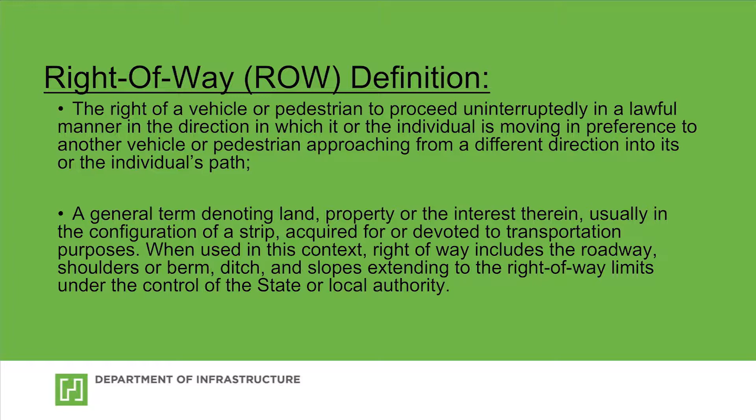Right-of-way definition: the right of a vehicle or pedestrian to proceed uninterruptedly in a lawful manner in the direction in which it or the individual is moving, in preference to another vehicle or pedestrian approaching from a different direction into its or the individual's path. It's also used as a general term denoting land, property, or the interest therein, usually in the configuration of a strip acquired for or devoted to transportation purposes. In this context, right-of-way includes the roadway, the shoulders or berm, the ditch, and slopes extending to the right-of-way limits under the control of the state or local authority - in this case, the City of Hamilton.

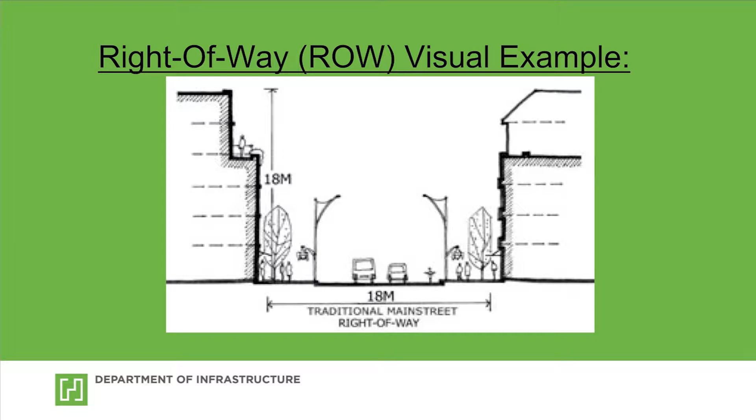This picture gives you a good illustration of the right-of-way. As you can see, the main portion of the street where the vehicles are going down, the curb and the sidewalk are all inclusive of the right-of-way.

Now, we get a lot of questions here at City Hall about vegetation maintenance in the right-of-way. We have a codified ordinance, I believe passed in the 1980s, ordinance 915.02 q and 915.05.b, which explains the responsibility of maintenance of plantings in or overhanging the public way. The public way means any public street, highway, public easement, sidewalk, alley, curb lawn, or public waterway, and includes the entire width of any right-of-way when any part thereof is open to use of the public as a matter of right for purposes of vehicular or pedestrian traffic.

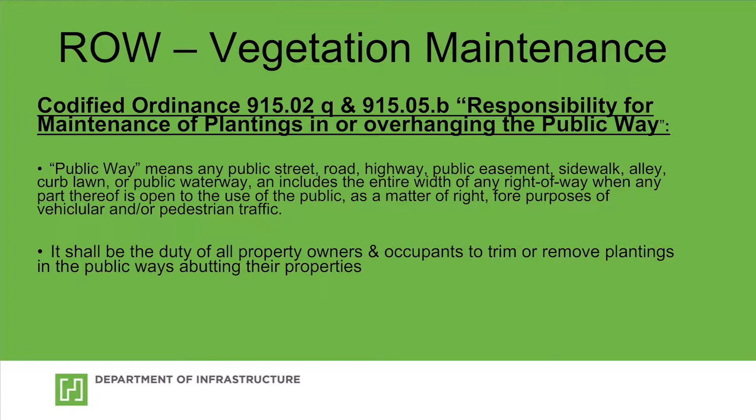Now, what this means, based off the codified ordinance, is that the owners of the property must maintain any of that vegetation in the right-of-way. That's the way it's set today. It shall be the duty of all property owners and occupants to trim and remove plantings in the public ways abutting their properties. This applies along all city streets as well as along all alleyways throughout Hamilton.

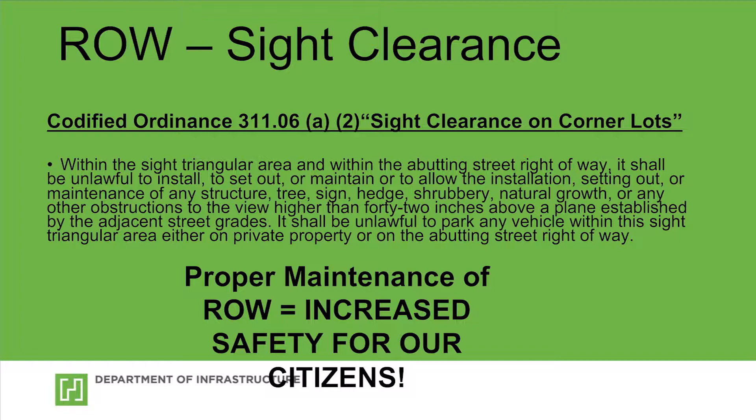Right-of-way sight clearance - this is a common problem, especially within South Erie Boulevard, which is Route 4, where we have a lot of our car sales businesses. Essentially, sometimes they park too close to the sidewalk and interfere with the right-of-way. We must maintain proper sight distance, and if we don't, it creates a safety problem. Proper maintenance of the right-of-way equals increased safety for our citizens - this is a very important point. If we don't maintain, cut vegetation blocking signs and visibility, then we can create a very unsafe environment for our citizens.

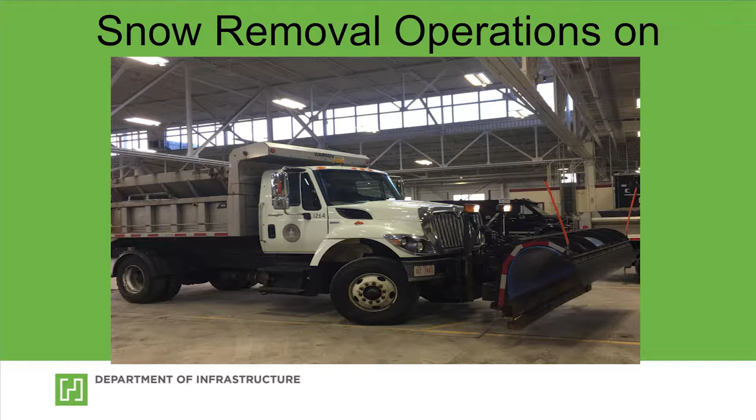Now, with this, I'd like to move and transition to another portion of the right-of-way which impacts our snow removal operations here in the city.

So to do that, I want to explain a little bit about what we do when we do snow operations. This is a big deal because we're coming through the winter of 2018, and hopefully we're through it. But if not, this gives you an idea of some of the things we have to take into consideration when we do snow removal operations in the right-of-way.

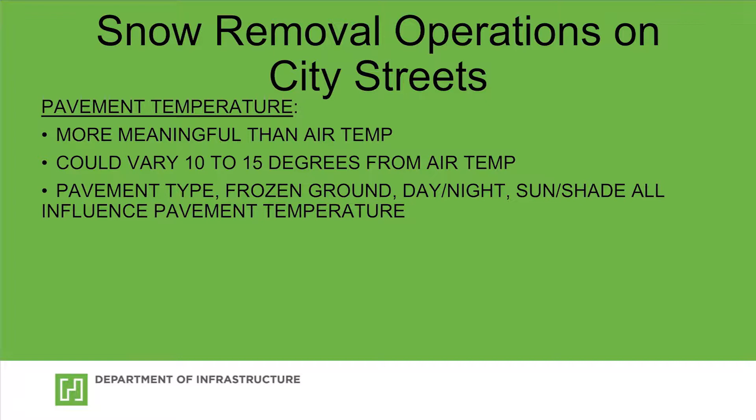Pavement temperature is more meaningful than air temperature. It could vary 10 to 15 degrees from air temperature. Pavement type is important as well, and all those factors are considered in the way we remove snow within our city.

As far as the melting time of salt, we use primarily salt within our removal - you see it in our salt trucks - but we also use calcium chloride, especially when temperatures dictate that. At 0 degrees, it takes salt mixed with calcium chloride about 30 minutes to melt snow.

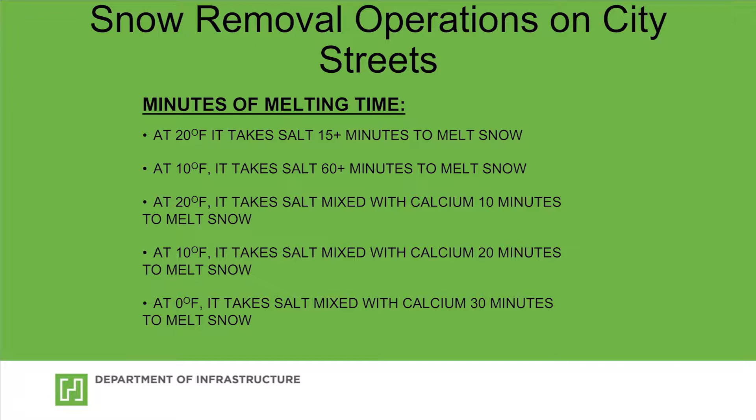Now in the right-of-ways, we do have a strategy associated with removal of snow. Our strategy is primaries first, secondaries next, parking lots city-owned follow that, and then sidewalks city-owned follow that.

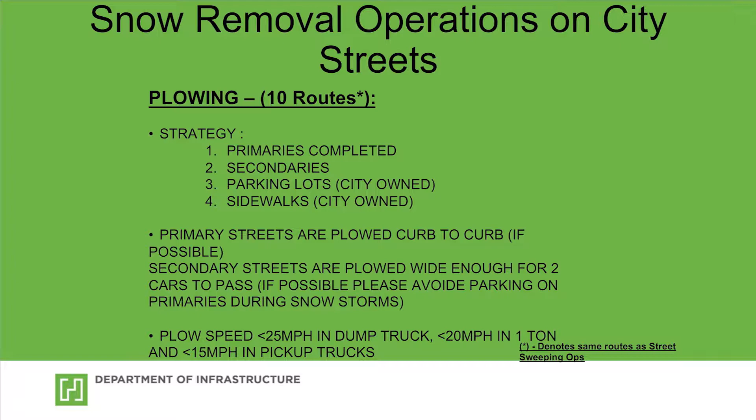The primary streets are plowed curb to curb, and the plow speed typically is about 25 miles per hour per truck. As we move through the winter conditions, we move straight into what we consider our street cleaning season, and that usually lasts from March through about the middle of November.

That's something I really wanted you to pay attention to, because if we didn't clean the streets, then essentially a lot of the debris that accumulates from trash and other means would end up in our waterways. So street sweeping is actually collected and then we haul it to our lift station, our transfer station, which is then hauled to the dump.

So we currently have 4 street sweepers in operation. Three sweepers operate every day, Monday through Friday during season, and we basically have 1 in redundancy.

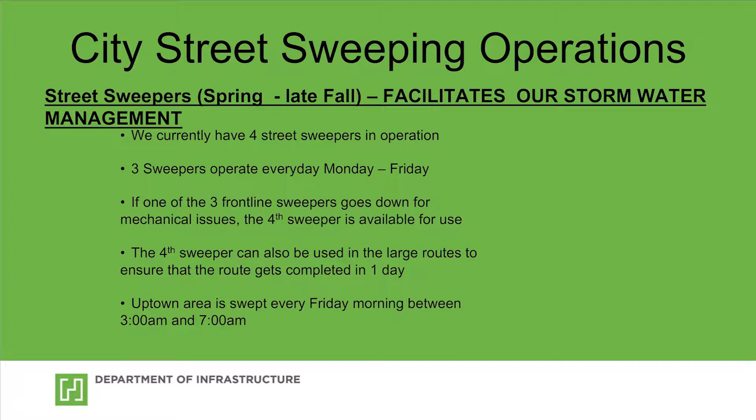The 4th sweeper can be used to facilitate any issues that we may have associated with one of our events, like some of the music events that we have along the river, or some of our events like Operation Pumpkin.

This gives you an example of the routes that those sweepers cover over a 2-week period. We have 10 routes, and these are the same routes that apply to our snow removal operation, so the same coverage based off the same routes. What you see here is the street sweeping routes by day for week 1 and week 2.

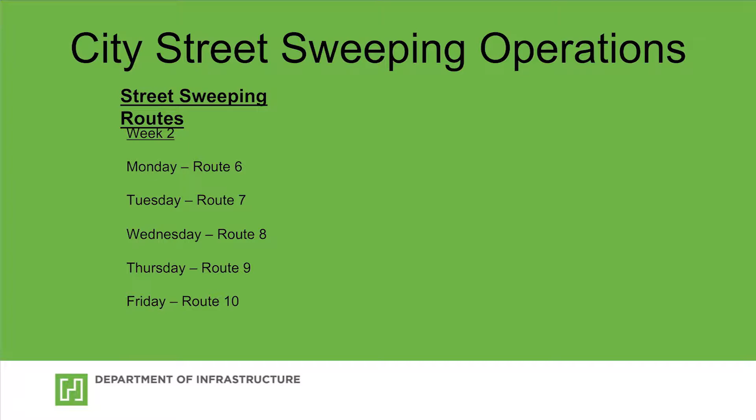So now we've moved into the fall, and we have leaf pickup and removal operations that happen again in the right-of-way. With this, you can see we have 2 different types. One is a manual type, where we have 2 men basically working the vacuum unit that trails behind the truck.

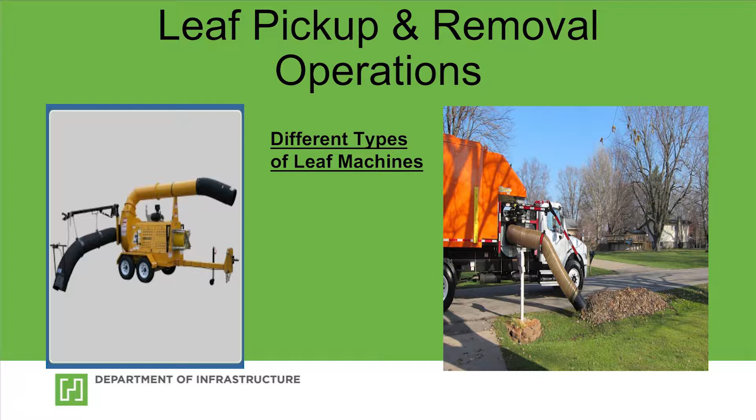And then we have the newer unit, where basically the laborer never has to leave the cab of the truck. Everything is handled through mechanical operation of the vacuum.

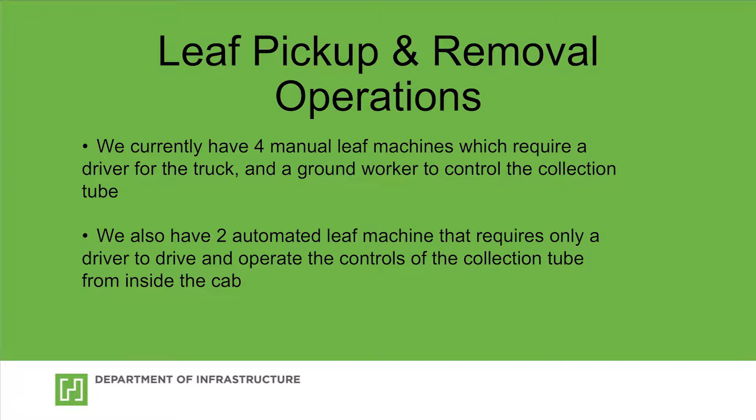Historically this starts the last week of October, and we run about 2 to 3 routes scheduled per week. But through our 311 system, we're actually still collecting leaves right now as we speak. Our 311 system is very comprehensive, and it lets us know what tasks we need to complete, so please continue to use that - it helps us evaluate our own performance.

Our goal for leaf removal is to be done by Christmas, but as you know, we got snow right around that time frame, and we've had pretty much snow up until last week. So we'll also be collecting leaves and street sweeping beginning here shortly, as long as weather permits.

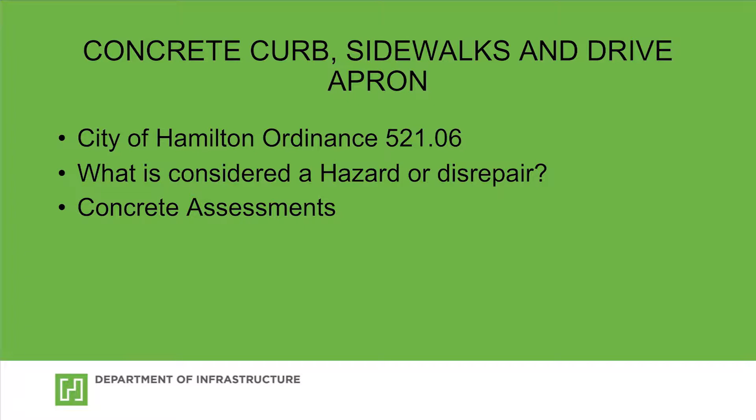We'll be discussing City of Hamilton Ordinance 521.06, what is considered a hazard or disrepair, and how a concrete assessment program works. City of Hamilton Ordinance 521.06 puts the responsibility for maintaining the concrete curbs and sidewalks onto the abutting property owner.

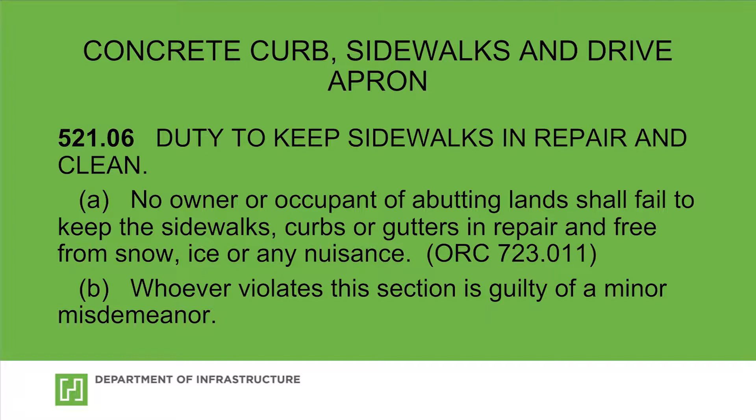Common hazards for sidewalks and driveways consist of sunken areas that trap water. This can cause ice in the wintertime and algae on the sidewalks in the summertime if it stays constantly wet. We're also looking for whether the concrete is raised a half inch or more, which could cause someone to trip. This is a guideline handed down to us from the Department of Justice through the Americans with Disabilities Act.

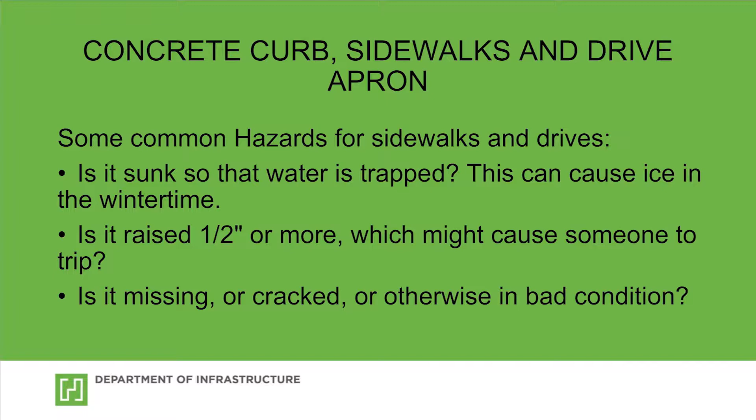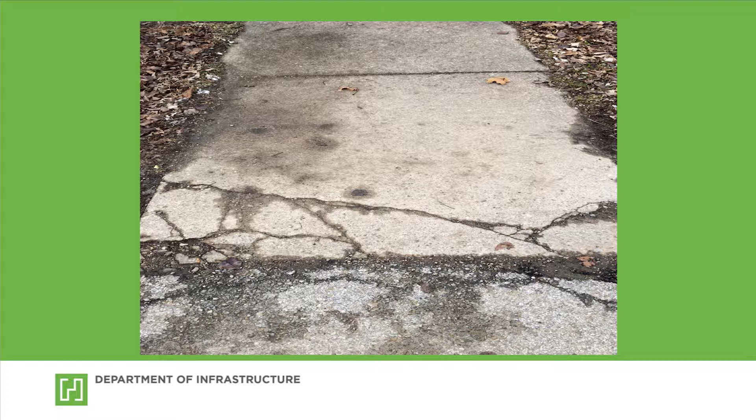We also look for missing pieces, cracks, or otherwise bad condition. Here's an example of a sidewalk block that has multiple cracks. You can see sections of the concrete just popping out. This would be considered a hazard. Here's a common hazard throughout the city in our older neighborhoods where we have a lot of trees that heave the sidewalk, causing tripping hazards.

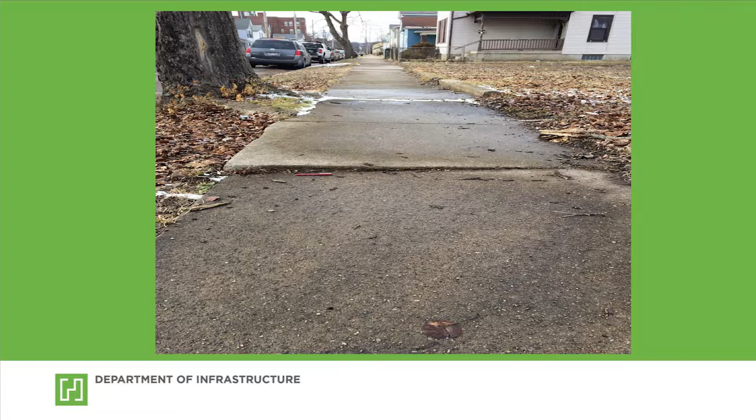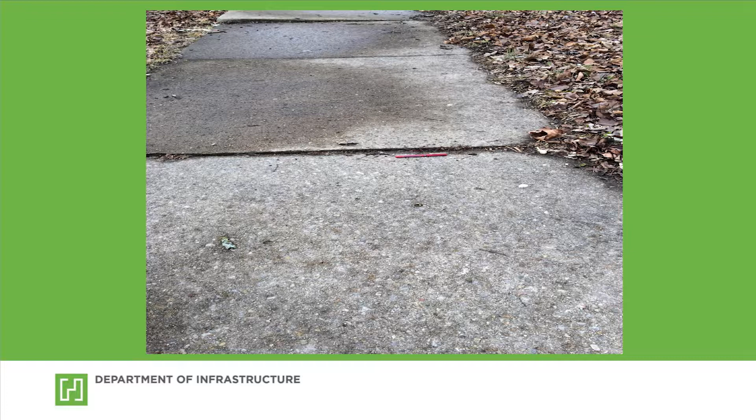Here's a smaller hazard, but it still meets that half inch tripping hazard requirement. Half an inch is a pretty small amount in reality, about the thickness of a pen.

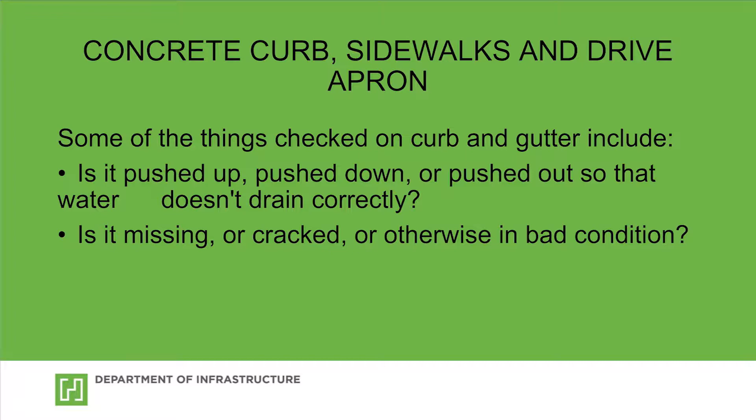Some things that we check for when it comes to curb and gutter include whether it's pushed up or down, or pushed out so that the water does not drain correctly down the roadway, causing water issues, and whether it's missing or cracked or otherwise in bad condition. Here's an example of a piece of curb where it's got multiple cracks in it, chipped out, just in bad condition.

Part of the concrete assessment program, every year the City of Hamilton has a resurfacing project that includes concrete assessment. We send out property owner notification letters that state you have so many sidewalk blocks and so many lineal feet of curb that are considered in disrepair.

Once a property owner receives a letter, they have the option of doing the work privately or having the City of Hamilton perform the work, and then it will be assessed to the property. When we say assessed to the property, that means the City of Hamilton will send them a bill and they have the option of putting it on their property taxes or paying it outright at that time. If it's rolled onto the property taxes, you have 5 years to make the payments.

Can a property owner request to have their concrete assessed? As it sits right now, a property owner can only have the concrete assessed if it's part of our resurfacing program. So if you're on one of the streets that we're doing for that year, then you can have more concrete assessed, or we will notify you of what's just needed. But we don't allow a property owner to just contact us and say, I would like to have it fixed by the city and have it assessed.

I'll now be turning it over to the Transportation and Traffic Division, Scott Hoover.

Hello, my name is Scott Hoover. I'm the Traffic Operations Manager for the City of Hamilton. My responsibilities include conducting various traffic safety studies, traffic signal timings, sight distance complaints at intersections, parking studies, parking lot rental and leasing, handicap parking on city streets, and construction and festival road closure plan and design. I'm also responsible for the traffic sign shop, traffic signal shop, parking meter operations, and parking garage operations.

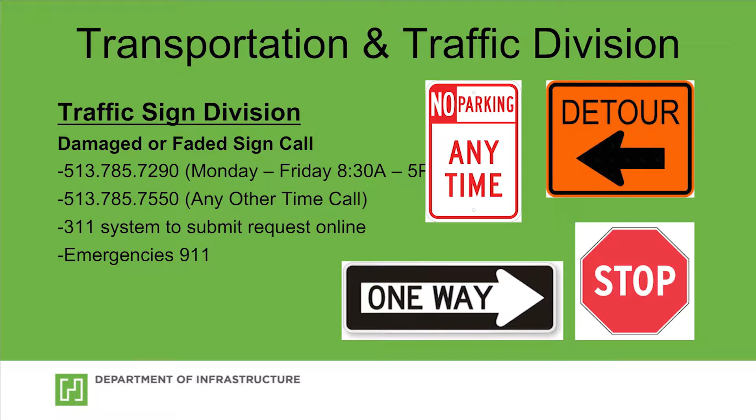The two numbers listed are not emergency numbers. One is for normal business hours and one is for after hours. Of course, the 311 system would still apply to this division. For emergencies, always call 911. Examples of an emergency for the sign division would be a sign that was hit and is sticking into the roadway or onto the sidewalk, which would cause a hazard.

The traffic signal division consists of 2 employees as well. They're responsible for inputting traffic signal timings and the maintenance of approximately 100 of the city's traffic signals. They're also responsible for the installation of all new traffic signals, as well as airport beacons.

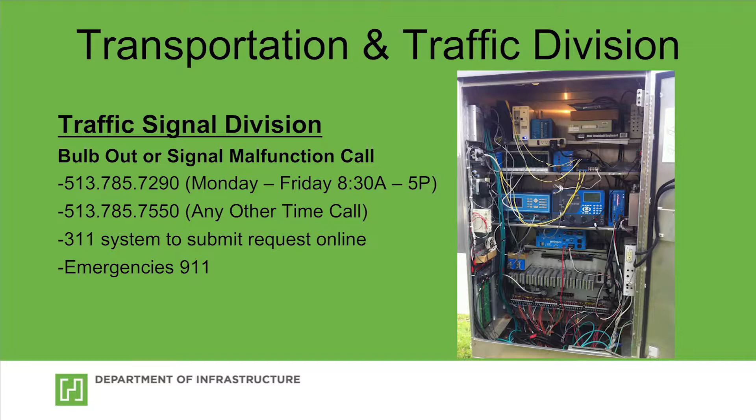Examples of malfunctions for the traffic signal division would be the signal timing not being what you're used to on your daily commute. If you encounter something like this or a bulb out, you're encouraged to call the 2 numbers listed, and again, the 311 system, as well as emergency, you would want to call 911. Examples of an emergency would be the signal being on flash or the signal being completely out. Those are the examples of a 911 call.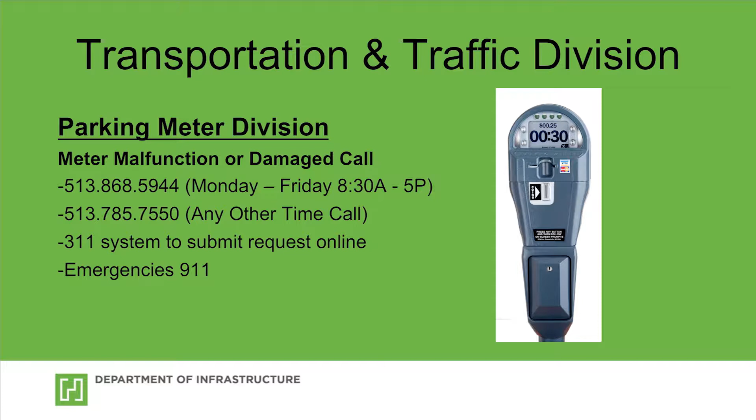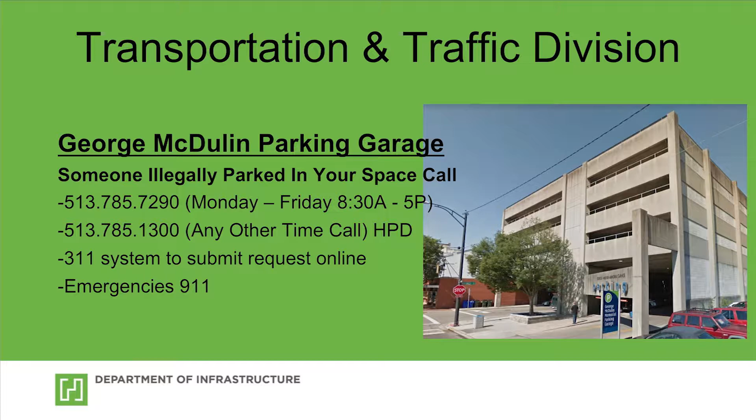For the parking garage, if someone's parked illegally in your space, you're encouraged to call the numbers listed as well. For emergencies, if you encounter any type of emergency, such as being stuck in the garage, 911 would be the call for that as well.

Next up is Alan Messer to talk about stormwater. My name is Alan Messer. I'm an engineer on staff here at the city. I'm going to talk about stormwater, specifically stormwater within the right-of-way.

Starting out, what is stormwater? When we refer to stormwater, we're typically referring to stormwater runoff, and that is essentially any precipitation that falls on the ground and doesn't soak in, but flows across the ground.

Hamilton is a very old city. In the early 1800s, when Hamilton and, at that time, Rossville were founded, most of the stormwater was conveyed by open channels, open ditches, that flowed through the roadways. As development progressed, they enclosed those ditches. In the mid-1800s, the image on the left is an old stone sewer that we believe was constructed probably mid-1800s, pre-Civil War. Some of those are still in operation today. It's amazing the craftsmanship that went into those.

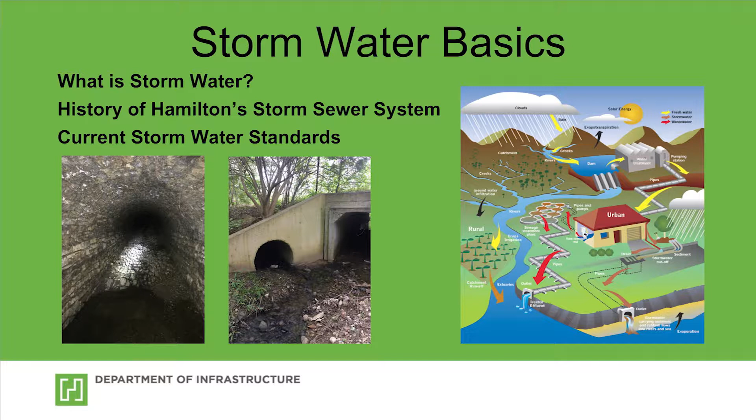Today's stormwater standards typically involve concrete or plastic pipe installation. There are certain industry standards that we design to today, as far as sizing. Also today there's what's called stormwater quality requirements, a federal regulation that says you're to slow down the water so that pollutants and sediments settle out before it reaches a natural water course.

Here in Hamilton, most of our stormwater eventually ends up in the Great Miami River, and all of us are responsible to keep trash and debris out of that water. The image on the right of the slide shows another typical section, similar to what Jim showed earlier, showing some of the stormwater facilities within the right-of-way.

One facility people often don't think of is the ditch. The roadside ditches are maintained by city crews. Now, ditches on private property are another matter, but some roads here within the city are served solely by ditches or by a combination of curb and ditches. So the curb also is a stormwater facility.

Now, the curb, as Pat mentioned earlier, is the property owner's responsibility to maintain. The city does do street sweeping and other activities to keep it clean, but the ongoing maintenance of that belongs to the property owner.

The curb inlets, or catch basins as people call them, are city maintained if they're within the right-of-way. Those that fall on private property, like parking lots, are typically privately maintained and the property owner's responsibility. A newer feature we have, started in the late 2000s, is installing sump lines, and those sump line collectors are essentially there to collect people's discharge from their basement sump pumps.

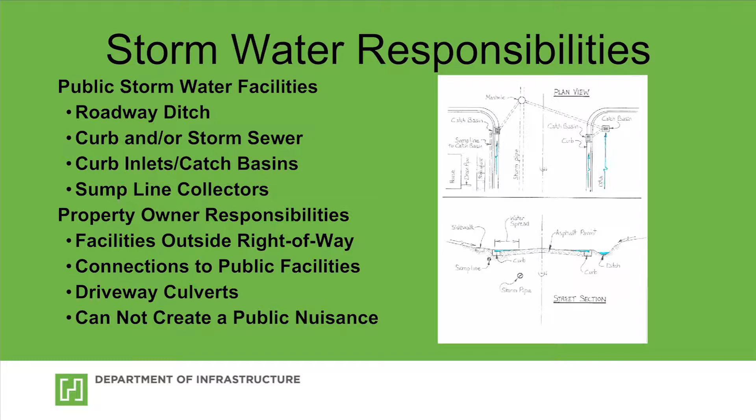Where we typically see that situation is a sump pump that discharges near the right-of-way or into the right-of-way, crosses a sidewalk, or dumps onto the curb and creates an icing situation, or algae in the summertime. It's the property owner's responsibility to properly dispose of that water, which may mean running it down the street to the nearest catch basin or taking it to a ditch or somewhere that it's otherwise properly disposed of.

Some common indicators of a problem within the stormwater system: the upper left picture is an example of flooding within the street. Some water standing on the sides of the road would be expected, maybe 6 or 8 feet wide, but 4 to 5 inches deep would be a normal occurrence. Anything over the curb or wider than that would be something we'd want reported to the city so we could look into the situation.

Sinkholes, the lower left-hand corner there is an example of one that we had, I believe, on Eden Park Drive. That's a good indication that something's wrong beneath. A lot of times if a pipe has a hole in it, it will suck some of the dirt down and create a sinkhole. Sometimes the pipes themselves actually collapse, and that's something we'd want to investigate right away.

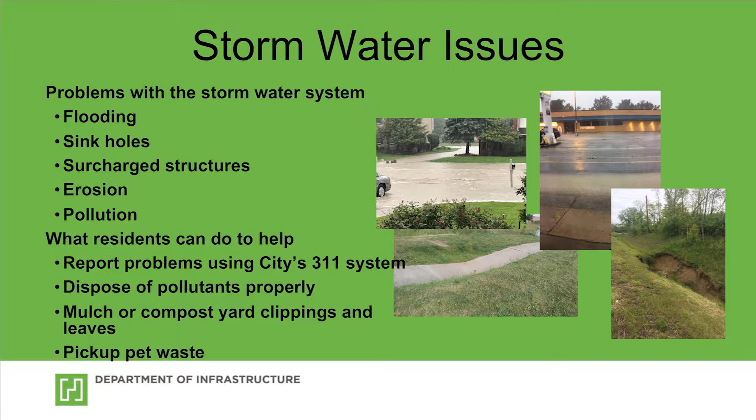Thanks, Alan. Are there any questions about anything? Yes, sir, I've got a couple of them.

We talked about the traffic division with signaling. Is there an Ohio state law about motorcycles having to wait a certain amount of time because their cycle doesn't trigger the signaling? I know Indiana has, I believe, a 3-minute wait time or something like that, and then you're allowed to go ahead and proceed. Sir, I'm going to repeat your question so we can capture it on the tape. Essentially, you want to know if there's an Ohio law that addresses the signaling, a timing associated with motorcycle traffic. I'm going to let Scott respond.

So with regards to traffic signal detection, in the city of Hamilton and a lot of other places in Ohio, there's different modes of detection. There's camera detection, radar detection, as well as inductive loop detection, which is basically a wire in the pavement. Video detection as well as radar will pick up a motorcycle that's in the proper zone via left turn, right turn, through movement.